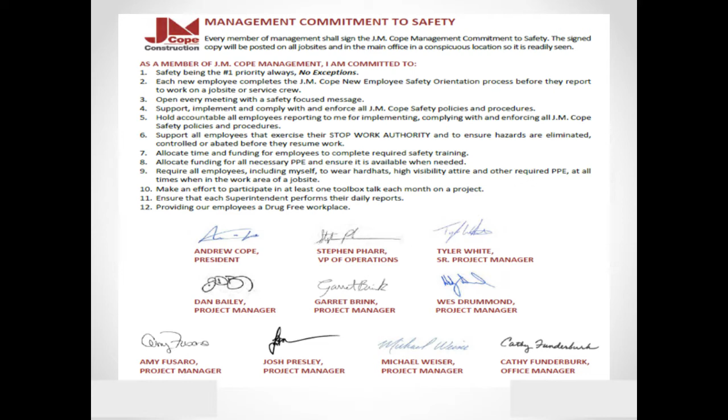Every member of the management team signed a commitment to safety as you see in front of you. A copy of this commitment to safety will be on hand at every job site. As a member of the J.M. Cope management team, we have committed to making safety the number one priority at all times, no exceptions.

Each new employee or subcontractor will complete a safety orientation before being allowed on site. As managers, we will open every meeting with a safety-focused message. We will support, implement, comply, and enforce all J.M. Cope safety policies and procedures. We will hold accountable all employees reporting to us for implementing, complying with, and enforcing all J.M. Cope safety policies and procedures.

We will support all employees that exercise their stop work authority and ensure hazards are eliminated, controlled, or abated before they resume work. We will allocate time and funding for employees to complete required safety training. We will allocate funding for all necessary PPE and ensure it's available when needed. We will require all employees, including us, to wear hard hats, high visibility attire, and other required PPE as needed in areas of job site.

We will make an effort to participate in at least one toolbox talk each month on a project. We will ensure that each superintendent performs their daily reports. We will ensure that our employees are provided with a drug-free workplace.

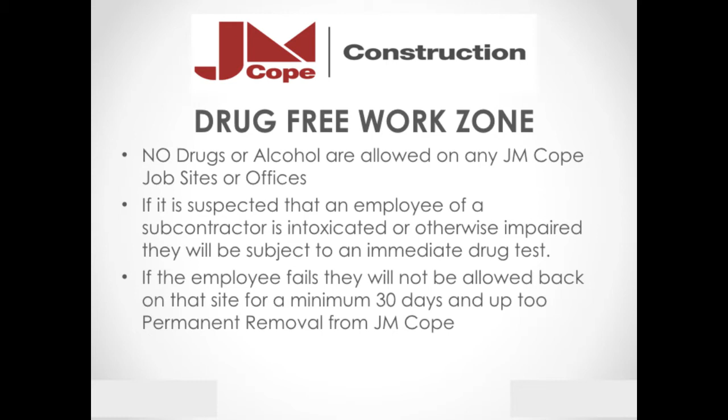PPE, what is required? Hard hats are required when there is a possible danger of head injury from impact, falling objects, electrocutions, or burns, anywhere on the job site. Any J.M. Cope superintendent has the right to enforce 100% hard hats at all times if he deems necessary. If there is one area on the job site that requires a hard hat, the entire job site will be required to wear them.

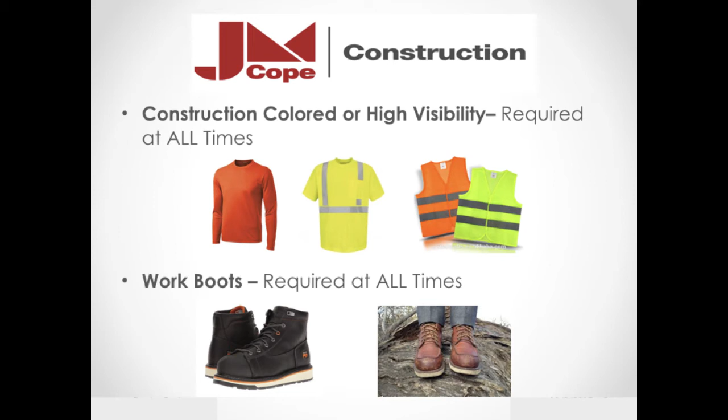Construction colored or high visibility attire will be required at all times. Work boots are required at all times. High visibility is required when operating major pieces of equipment or when working around major pieces of equipment. Construction colored or high visibility shirts or jackets are required as a surface layer at all times. If you are operating a piece of equipment or working around a piece of equipment, you are required to wear high visibility.

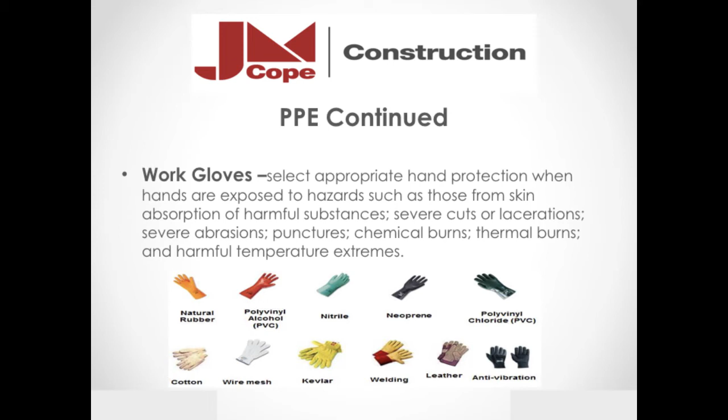PPE continued: work gloves. Select appropriate hand protection when hands are exposed to hazards, such as those from skin absorption from harmful substances, severe cuts or lacerations, severe abrasions, punctures, chemical burns, thermal burns, and harmful temperature extremes. On the screen, you'll see examples of the types of gloves that may be required per what you are doing.

Face and eye protection are required when workers are exposed to eye or face hazards such as flying objects, molten metal, liquid chemicals, acids or caustic liquids, chemical gases or vapors, or potentially injurious light radiation.

Fall protection: J.M. Cope requires that you wear fall protection when anyone on site is exposed to a potential free fall greater than 6 feet. Working on a boom lift, you must also wear fall protection when operating equipment that requires it per OSHA. Fall protection may be required on a ladder if working above the 6th rung. Ladder safety: an individual must be tied off if working from the 6th rung of the ladder or higher.

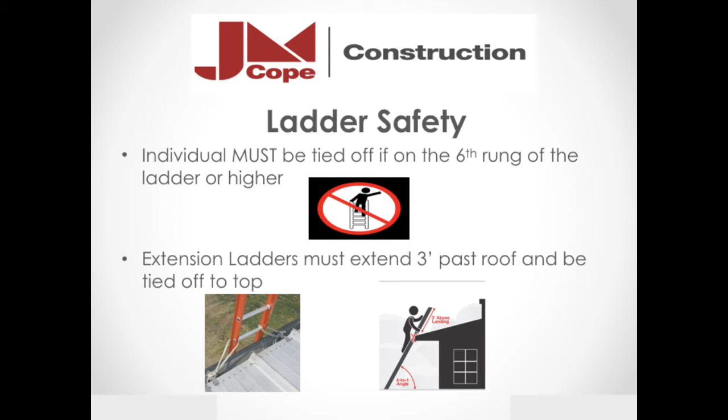Extension ladders must extend 3 feet past the roof and be tied off at the top. All extension ladders must utilize the 4-to-1 angle when laying across the roof. All ladders must be fully serviceable and free of any visible defects, for example, a bent foot, a cracked step, or a missing screw or bolt.

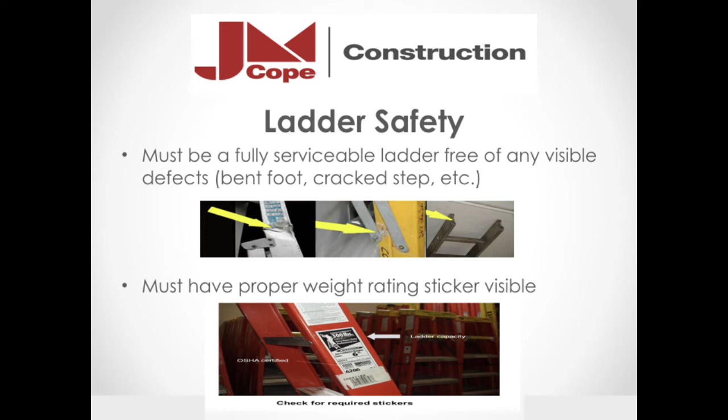All ladders must have the proper weight rating sticker as required by OSHA, for example 225 pounds, 250 pounds, or 300 pounds. Color coding will not suffice as a weight rating, as these colors differentiate between ladder manufacturers.

All ladders must be used for their design intent. To use an A-frame ladder, it must be opened and spread to its full extension and may not rest on a wall. You cannot stand on the top 2 steps or platform of an A-frame ladder. Extension ladders may not be used as scaffolding or walkboards.

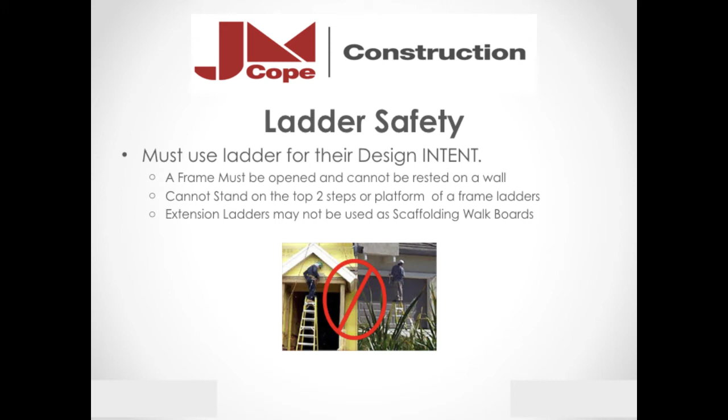Equipment. To operate any equipment on a JM Cope site, an individual must be able to provide proof of training to the site superintendent upon request. This includes but is not limited to scissor lifts, boom lifts, all excavation equipment, and all sizes of cranes.

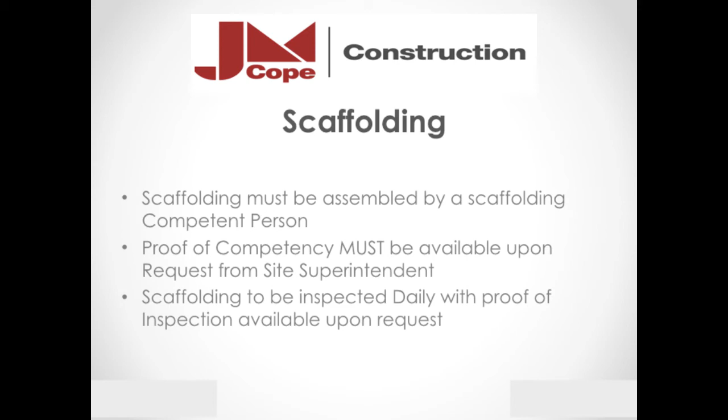All equipment must be inspected each day prior to use, and those inspections must be available upon request by the site superintendent. Scaffolding must be assembled by a scaffolding competent person. Proof of competency must be available upon request from site superintendent. Scaffolding is to be inspected daily with proof of inspection available upon request and on display on scaffolding.

Lockout tagout is required when working on any source of hazardous energy so that the energy is isolated and rendered inoperative. Proper arc flash PPE is required if lockout tagout is not possible.

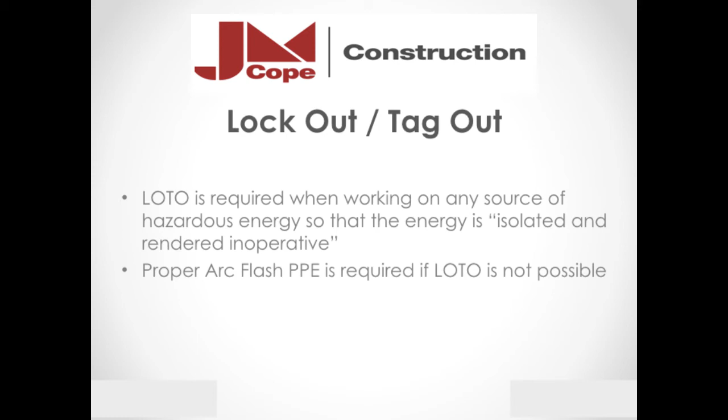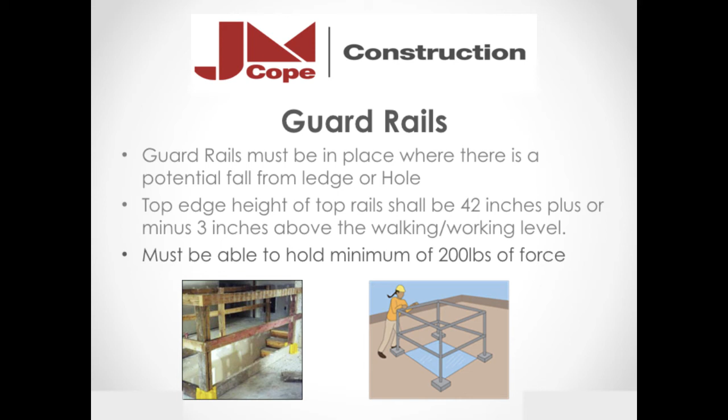Guardrails must be in place where there is a potential fall from a ledge or hole. Top edge height of top rails shall be 42 inches plus or minus 3 inches above the working level. All guardrails must be able to hold a minimum of 200 pounds of force.

Trenching. Shoring is required when the excavation depth goes below 4 feet. There will be different types of soil when you are excavating. Please reference 1926 for the types of soil and standards that apply to your operation. 2 means of exit are required at all times if working inside a trench. Individual working inside a trench must have a lifeline extended above the top of the working surface.

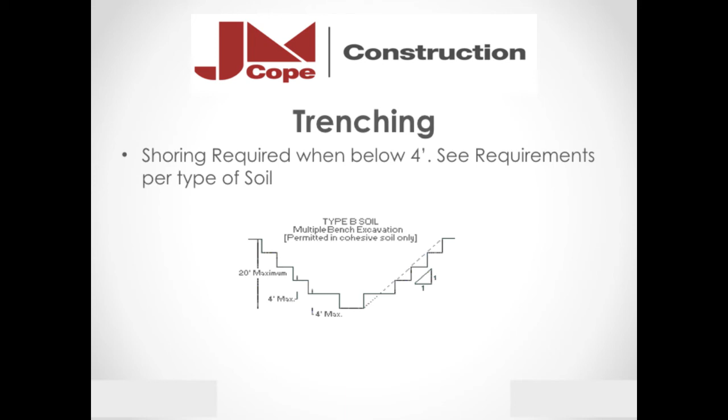Rebar. Rebar caps are required for all vertical rebar, no matter the height. Gloves are required when handling rebar, no exceptions.

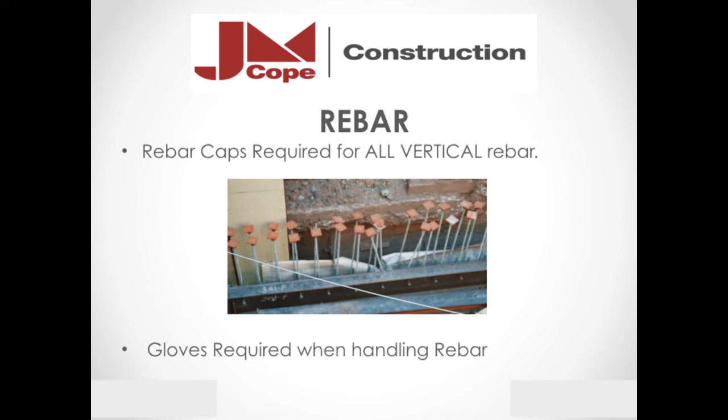Silica. JM Cope sites are dust-free. When controlling silica dust, please use one of the OSHA-approved standards of control, whether it be by water or vacuum-powered tools.

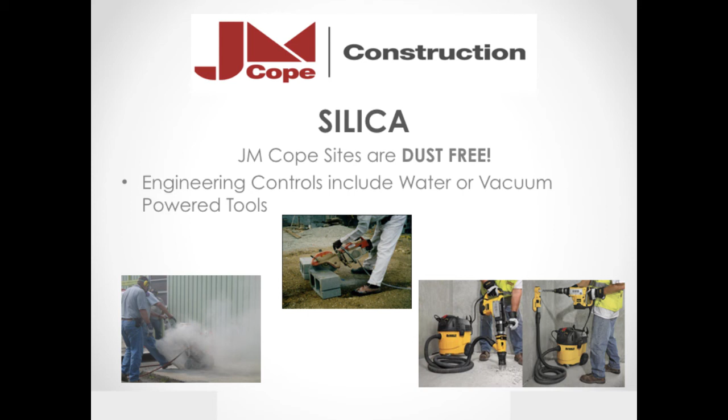Crane operations. When any crane, no matter the size, is on site and performing any type of work, a load plan must be submitted prior to any operation.

Certified rigger. Subcontractors must provide a certified rigger on site and fully involved with operations of the crane from start to finish. Subcontractors must set up a barrier around the swing radius of the crane before operation starts and not take it down until crane is broken down.

Daily operations. At the beginning of each day, each subcontractor is required to turn in a job hazard analysis, or JHA, before the start of work. That JHA will outline the work to be performed that day and any safety protocols that are in place. The JHA will also have a head count and be signed off on by the subcontractor's team. Work cannot start until both operations are complete.

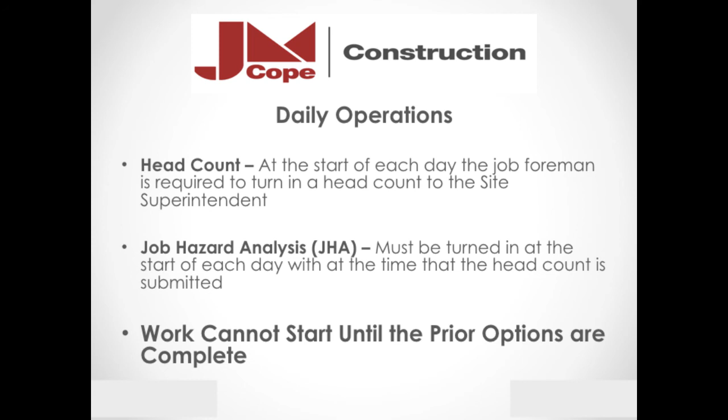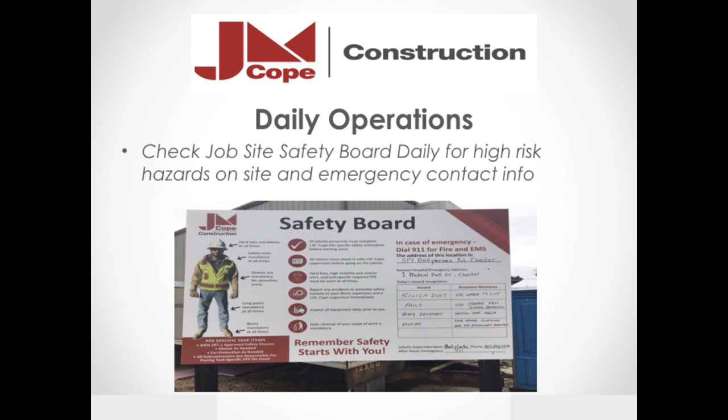At the main entry of each JM Cope job site, we will have a safety board posted with the major hazards of the day. That board also has the job site address, the closest hospital, the job site superintendent's contact information, and any applicable emergency numbers.

Emergencies other than first aid. If there's an incident that requires anything more than first aid, immediately call 911. Please reference the Job Site Safety Board for the job site address. Alert the superintendent. Do not disturb the area where the injury or incident occurred. The job will be on lockdown, and no person will be allowed to work, leave, or enter the site until the superintendent permits.

Identification. If you are working on any JM Cope site, you must have a JM Cope safety hard hat sticker displayed with your assigned number clearly visible. You will receive your sticker at the end of this video. Failure to comply with any JM Cope safety regulations can result in up to permanent removal from all JM Cope sites.